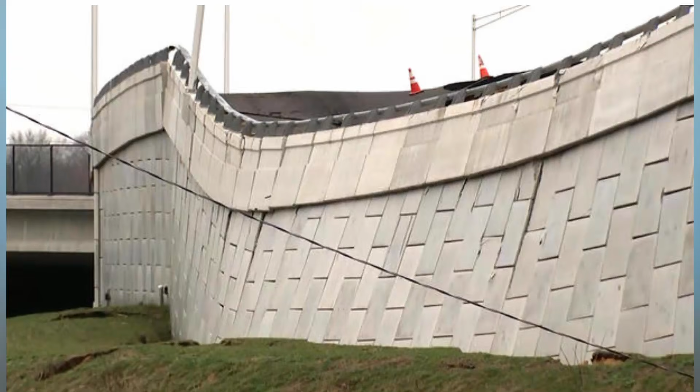So we see a few photos here of the wall failure. This is a mechanically stabilized earth retaining wall. Over a 300-foot section failed overnight on March 25th, 2021.

Now, where things get interesting is there's a local CBS News affiliate in Philadelphia, and this reporter, Brandon Goldner, I think he was relatively new in the TV news business, but he had a natural curiosity about how something like this could have occurred. So on his own time, he did investigative research over a period of 2 years and requested public information, public records about this wall failure, and he just got it. He did a news story about this last week.

As an aside, I really applaud that type of initiative. I think this country needs more people like that in whatever jobs they have. In the last few years, there's a lot of talk about quiet quitting and just doing the bare minimum, which I've never been in favor of in terms of work. If you're a person that shows initiative and has a natural curiosity, you're going to learn a lot of things. Your job's going to be way more interesting, and you're going to bring tremendous value to whoever you're working for. That's going to pay off in the long run. That's my view of things.

Now, this reporter brought in Grady Hillhouse from the Practical Engineering channel to review this information and offer some opinions. The reporter asked Hillhouse why the DOT ignored persistent and obvious warnings from the contractor that this wall was going to fail. I'll just play you what he said here.

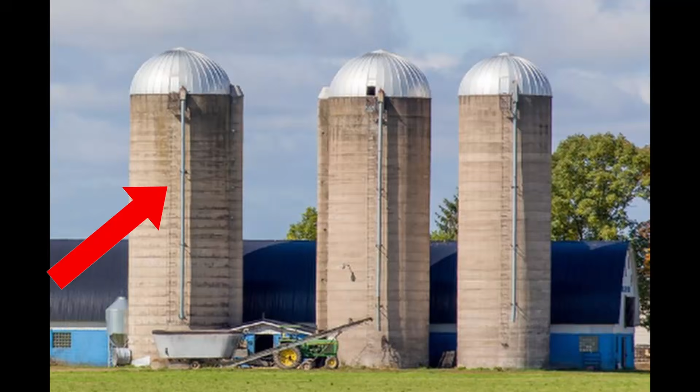You typically have the DOT as one silo. You have the project designer in another silo. Now, sometimes the designer is DOT staff, but more often than not, it's an outside private consultant, which was the case here for the overall design of this retaining wall. And then the final silo is the contractor.

Unfortunately, I've seen this a number of times where the DOTs think they're only doing their job if they pretty much just bust the chops of the contractor from beginning to end throughout a project. They seem to think that the contractor's out to get them at every turn, and the DOT's the keeper of all things quality and proper, and the contractor's just going to try and get away with whatever he can to cut corners and save money. And that's just not been my experience.

Most of my work in the last 25 years on these DOT projects has been done for contractors. I'd say 95% of my business comes from working with contractors. And the contractors I work with are extremely dedicated and want to produce a high quality product. They don't want to have any problems, end up in lawsuits, or get a bad reputation. This work is extremely competitive, so their reputation means a lot. So I don't agree with this adversarial mindset that I see in too many instances on these projects.

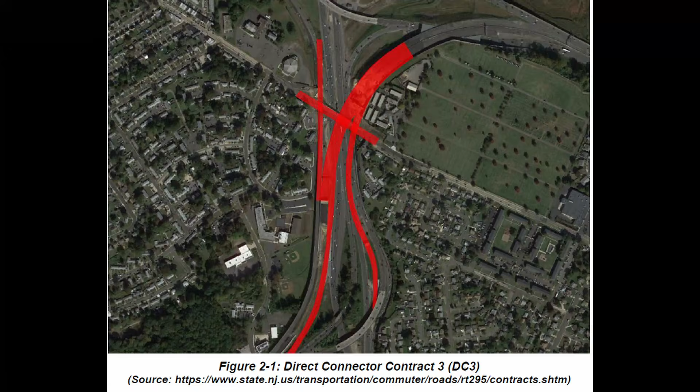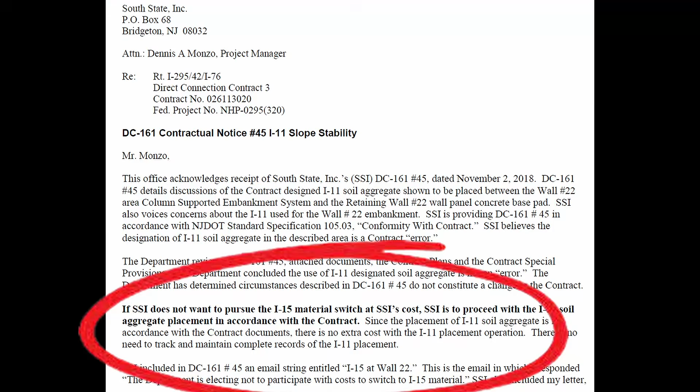As I'll discuss later in this video, the contractor pointed out what could be done to avoid this wall failure. It was going to involve some extra costs, and rightly so, because their designers were going to have to do additional work and produce additional or revised construction documents. It was going to cost $70,000. The DOT came back and said, well, if you want to do that, you can do it on your own expense - we'll approve the material change, but we're not going to pay for any part of it, which was extremely short-sighted. They traded a $70,000 expenditure for a $92 million expenditure before it's all said and done.

I don't know what kind of accountability is going to come out of New Jersey DOT relative to the people involved with this project. I don't know too many people in the private sector who could cost their agency $92 million and a lot of embarrassment and loss of reputation without having some serious repercussions. I have no idea. Seems like accountability is not high on the list these days with government entities.

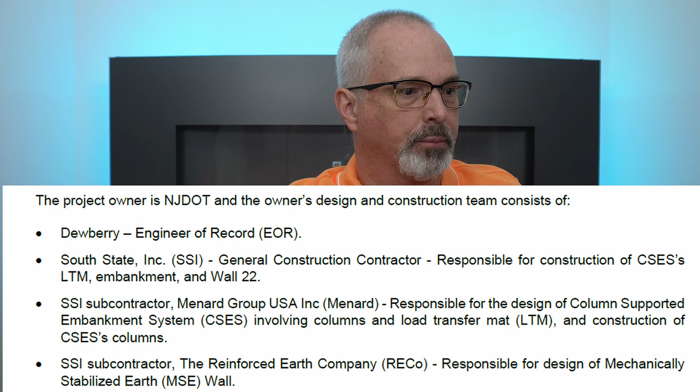Some of the other players: Dewberry, the engineer of record, were responsible for the overall design of this retaining wall. Then you have South State Inc., the general contractor, who gave New Jersey DOT repeated warnings that they were using the wrong material for this retaining wall, and that it should change to a more freely draining material to avoid a future failure of the wall, which ultimately occurred. Then you have Menard Group - they designed the column-supported embankment. And then you have the Reinforced Earth Company, who designed the mechanically stabilized earth wall. So Menard and Reinforced Earth Company were sub-consultants to the prime contractor here, SSI, as I'll refer to them.

And that's typical in retaining wall design. The designer, say for the MSE wall, is only responsible for that discrete portion of the wall. And then somebody else is responsible for what they call global stability, analyzing the thing as a whole. So the Reinforced Earth Company was responsible for designing the MSE wall, Menard was responsible for designing the column-supported embankment system, and Dewberry was responsible for the overall design and making sure it was going to work, including global stability.

Then you have South State, as I mentioned, Menard, and Reinforced Earth. You also had a few other players as a subconsultant to the prime contractor. You had Wang Technology that installed the inclinometers and other instrumentation to monitor the condition of this slope throughout construction. And then you've got New Jersey Department of Transportation Bureau of Materials.

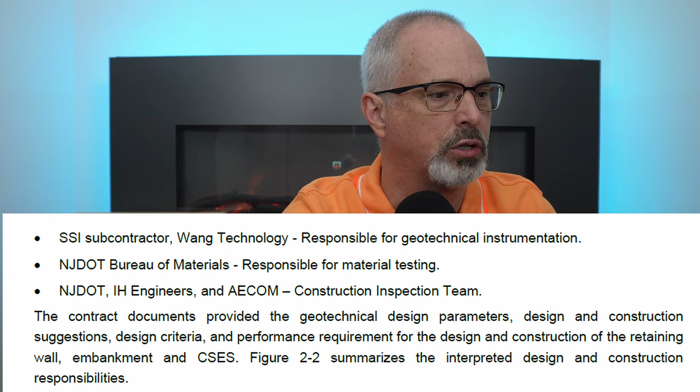They were responsible for material testing, the fills and other materials that were used to construct this retaining wall. And then you have both New Jersey and IH engineers and AECOM responsible for construction observation while this wall was built.

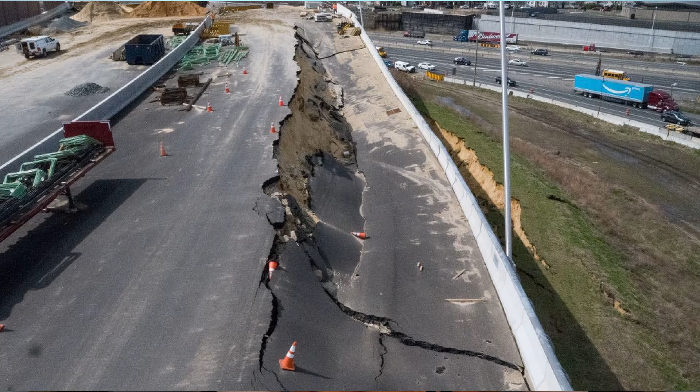Now, as I mentioned, this wall failed exactly in the way that the contractor said it was going to fail, and that was a global stability failure. Anytime you see loss of material at the top of the slope and a scarp forming, which is a vertical or near vertical face, and then a bulge of soil material at the base of the wall, well below the bottom of the wall, that suggests you have a global stability failure.

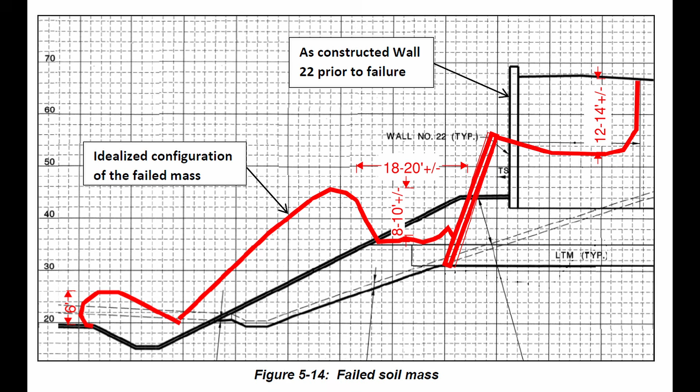It's obvious. Here we see a cross-section of the failure. The red line shows the post-failure configuration of the slope. So you had a loss of material at the top. You had a lot of tilting of the MSE wall face, and then you had a big bulge of material piling up at the base of the slope as it failed.

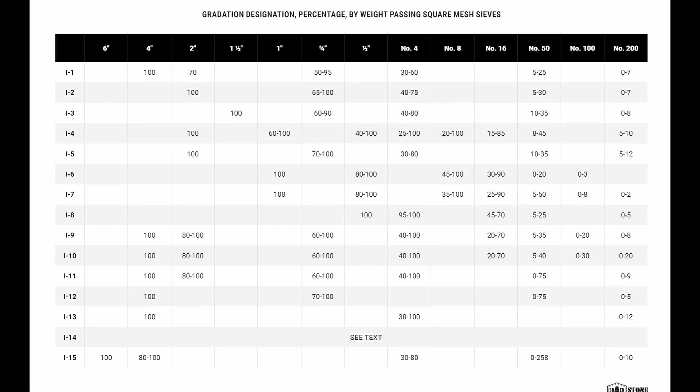Now, as I mentioned, there was correspondence from the contractor, most pointedly and earliest in 2018, saying you're using the wrong material for the backfill. You're using what they call I-11, which is a pretty fine-grained sand that doesn't drain very well, and the contractor thought they should be using I-15 gradation material, a little bit coarser, has better drainage characteristics. So this type of correspondence and notification went on back and forth throughout the duration of the project.

And then on March 24th, 2021, as the wall began to fail, the contractor issued this letter to the DOT, and it summarizes all his prior warnings. I mean, it's an I-told-you-so letter, and it was appropriate for the contractor to send this, in my opinion. It's just ridiculous that these warnings were overlooked and disregarded.

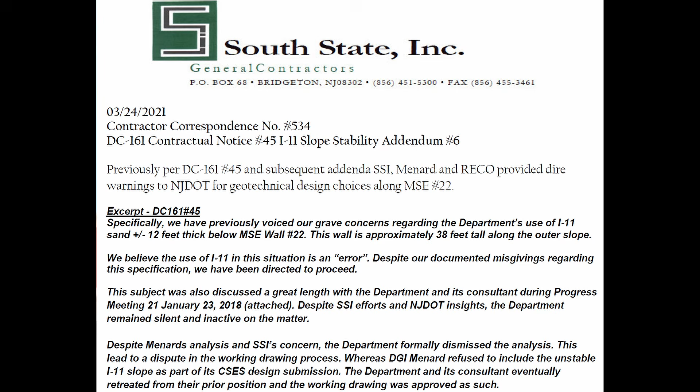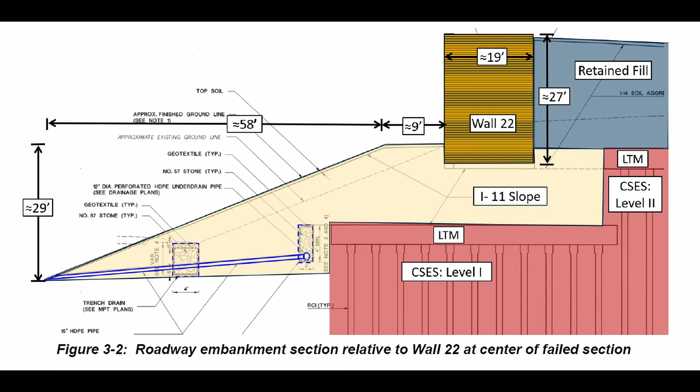So you can see reference here to them mentioning in January of 2018 that this was the wrong backfill material to use, and that their specialty consultant for the column-supported embankment agreed that this was going to be problematic material if it wasn't changed. So again, the yellow is this I-11 backfill. The contractor said that needed to be changed to a coarser gradation that would have better drainage characteristics.

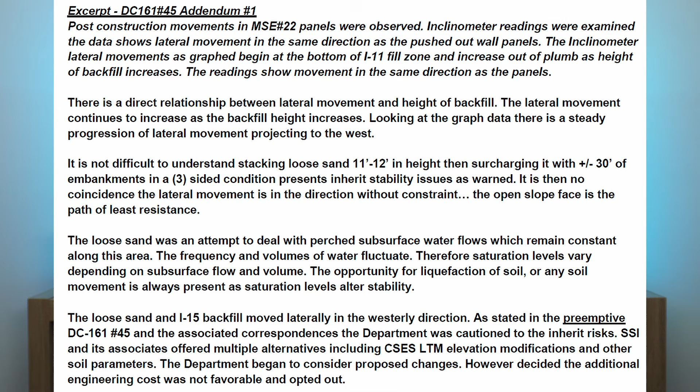Here's some additional details: there were noted instances of wall panel displacement. The inclinometer readings showed movement of the foundation soils, which resulted in tilting of the backfill and the wall elements.

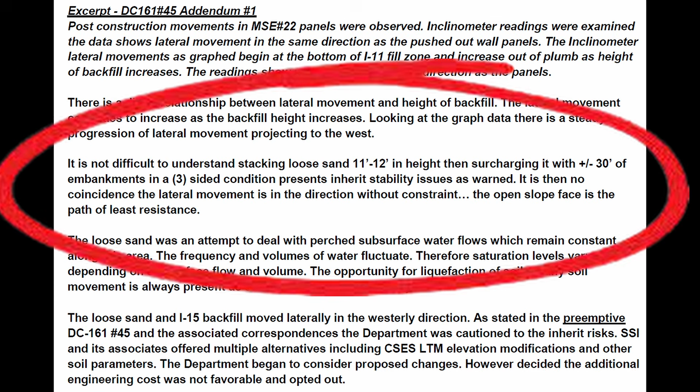You got to appreciate this paragraph. It is not difficult to understand that stacking loose sand 11 to 12 feet in height, then surcharging it with a plus-or-minus 30-foot embankment in a three-sided condition, presents inherent stability issues as warned. It is then no coincidence the lateral movement is in the direction without constraint. The open face is the path of least resistance.

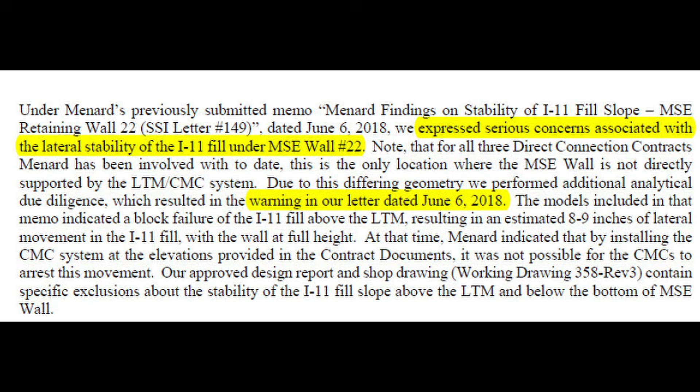And in this March 24th, 2021 letter, which was issued just a few hours before the wall ultimately failed, they point out that Menard expressed serious concerns associated with lateral stability of the I-11 fill under MSE wall number 22. This is the wall that failed. And they said they performed additional analysis that showed this wall was going to fail, unless there was a change in the backfill material.

So this part of the letter references the fact that New Jersey DOT considered that these early signs of wall distress were due solely to the lack of proper placement and compaction methods of the backfill material by the contractor. And what Menard points out is, no, these movements are completely consistent with our analysis in that you're using the wrong backfill material.

Now, as I mentioned, this letter went out from the contractor to New Jersey DOT on March 24th, 2021, less than 12 hours before the wall had a massive or catastrophic failure. Fortunately, no one was injured as a result, but it could have been very different, especially if there had been traffic over the top of it.

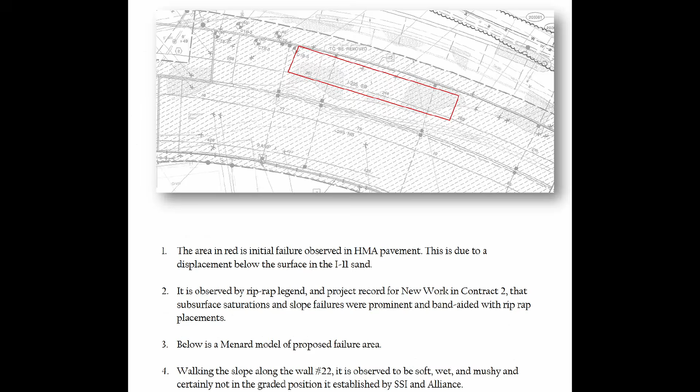So you can see the red highlighted area is the area of tension crack development in the roadway section. This roadway is on top of the MSE wall, and the contractor references the DOT's prior responses, which mention that the department disagrees with the circumstances of the wall panel resetting. It cost the contractor $65,000 to reset these wall panels early in the process of construction.

And the DOT said, that's your problem, we're not paying for it. They also point out that the contractor told them this is the wrong fill material, and again New Jersey DOT said, no, we're fine with it. Our consultant Dewberry reviewed it. We're sticking with that I-11 material.

Now this is a pretty interesting statement, and again I think it's appropriate. It seems to SSI, Menard, and Reinforced Earth Company, the limited liability language provided in New Jersey DOT responses has no effect on the ongoing geotechnical realities. New Jersey DOT now has a significant issue to deal with, in spite of the very detailed record of warnings beginning with this correspondence on November 2nd, 2018.

So in other words, the DOT's designer, Dewberry, was ultimately responsible for this wall. They had the responsibility for checking the global stability. The specialty consultants working for the contractor had a very narrowly limited scope of design responsibility relative to either the MSE wall or the column-supported embankment. So in other words, this is New Jersey's baby all the way, and the contractor warned them repeatedly.

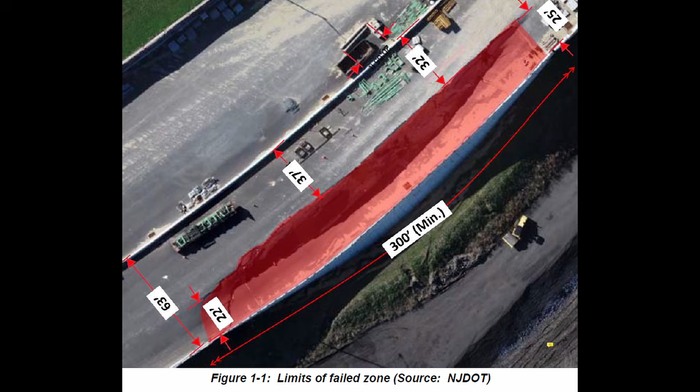Okay, so the wall fails overnight on March 24th, 2021. Here's a view of the wall failure from a photo included in the forensic report done by Hardesty and Hanover. You can see the red highlighted area on the roadway section, above the MSE wall. And then down below you see the green grass-covered slope that's all bulged up, indicative of a failure that goes from the top of the slope down through the foundation soils, pushing material out beyond the original toe of the slope.

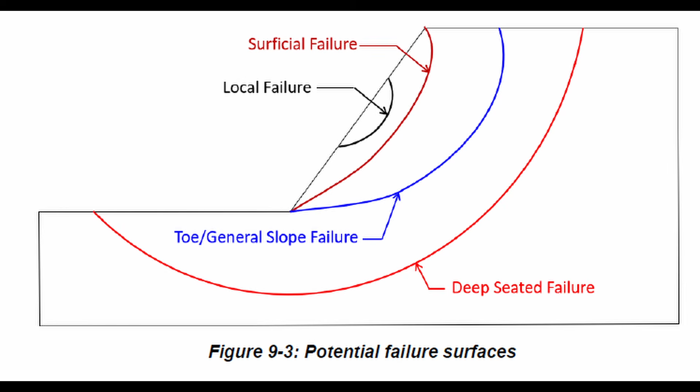So when I talk about global stability analysis, this is what's called a limit equilibrium calculation. You assume a trial shear surface, break it into vertical sections, and assign a soil unit density. With the geometry, you determine the forces pushing the slope downward and the forces resisting that movement, including the available soil shear strength along that potential shear surface.

And the type of failure that occurred here is a deep-seated failure. Whenever you have a deep-seated failure, that means you've got a problem with your foundation soils. In this case, those foundation soils correspond to the I-11 backfill that the contractor said needed to be changed to I-15, so it wouldn't retain as much water, would have greater shear strength available, and provide greater resistance and a higher factor of safety against a potential failure.

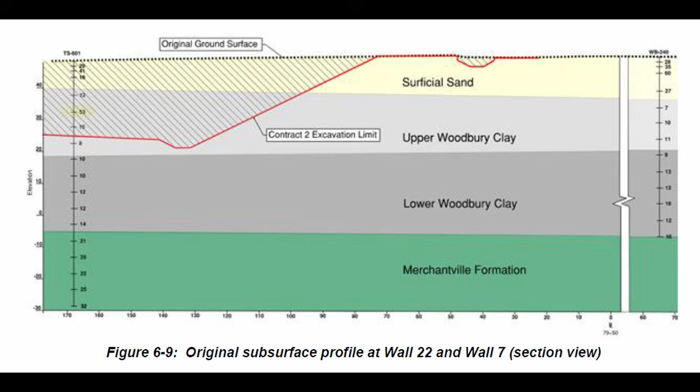So this is what the soil profile looks like. You have a surficial sand, an upper clay, a lower clay. The Merchantville Formation underlying these clay deposits is indicated to consist of hard silt and clay with medium to very dense interbeds of silty sand. So obviously you wouldn't be concerned about a potential shear surface going that deep.

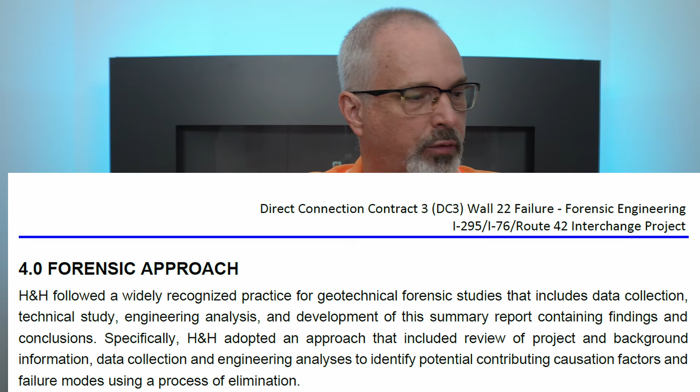H&H followed a widely recognized practice for geotechnical forensic studies that includes data collection, technical study, engineering analysis, and development of this summary report containing findings and conclusions. It goes on to say this was done to identify potential contributing causation factors and failure modes using a process of elimination. Now, I don't disagree that you have to be thorough and open-minded in these types of studies, but given the failure mechanism and the repeated warnings from the contractor and the contractor's specialty engineering consultants that this was going to happen, and it happened exactly how they said it was going to happen, it's pretty obvious.

And I don't see that a full-blown forensic study taking nearly a year after the wall had failed was necessary. I did a search and found that New Jersey DOT spent $283,000 for Hardesty and Hanover to do this forensic analysis. That's a lot of money, especially considering that they weren't going to spend the $70,000 to do this construction right to begin with.

Given how this failure mechanism was pretty obvious and consistent with exactly what the contractor said would happen, I think this study could have been done for about $10,000 and completed within a month. So you have to ask yourself, was New Jersey DOT being super thorough and examining all possibilities? Or is it a matter of them desperately hoping that a forensic investigation would uncover something somewhere that the contractor didn't do right? I think the latter is a possibility, but there's no information in the correspondence confirming this.

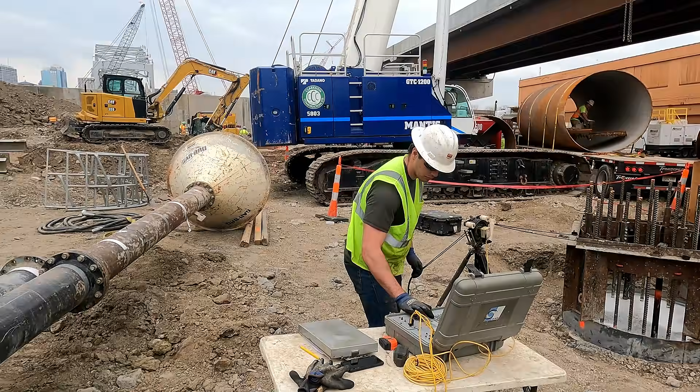So this notion of the DOT spending extra money so they could hang the contractor with extra responsibility or costs, I see in a small version with my testing of drilled shafts for bridges during construction. There are instances where, I'll show you a quick video of what the CSL data collection looks like. We've got probes that go into steel tubes cast inside the reinforced concrete drilled shaft, and we send an ultrasonic signal from one tube to the next, so we're able to identify areas of low density that might be weaker concrete, gravel, or a soil inclusion.

There are times where I identify a very small area that may have questionable quality concrete, and I may even say, yeah, it's small, it's right next to, in this case, tube number 1.

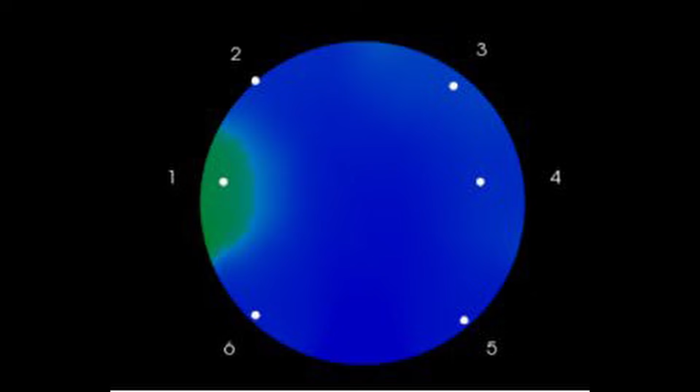If you try to core it, which is a common thing to do for identifying anomalies found through cross-hole sonic logging testing, you perform a full-length core to get to that zone of interest, usually at the bottom of the shaft. And I'll say in my report that it's probably not worth coring — I don't think you'll be able to hit it.

And I see in several instances where they'll do the core anyway, they don't hit anything, and then they'll do a second core, presumably hoping to intersect an area of poor quality concrete, because if it's good concrete in all the cores, the DOT has to pay for the coring. But if any poor quality concrete is confirmed through a core, the contractor has to pay for all the coring costs. So it seems in some cases extra holes are drilled in the hopes that the contractor has to pick up the tab for all of that investigation.

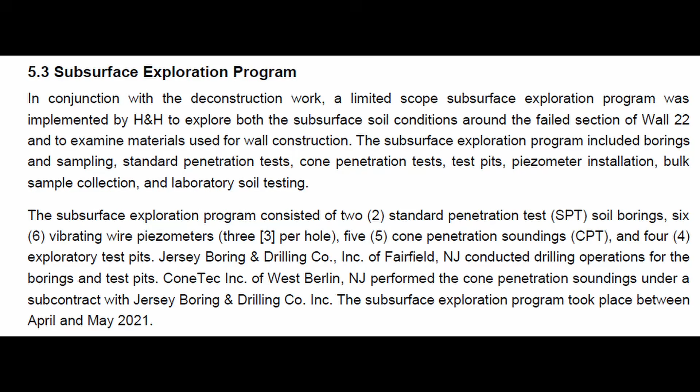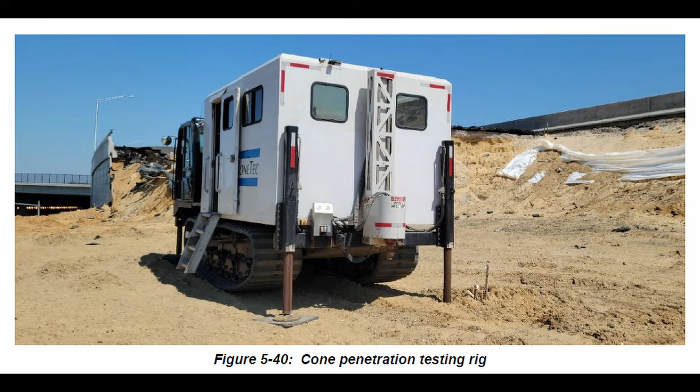So I'm going to go through what H&H, Hardesty and Hanover, did for their forensic investigation. They did soil borings, cone penetrometer testing — that's the cone rig there, where you push a cone with electronic instrumentation and get characteristics of the side resistance and tip resistance, allowing you to classify the soils. You can also do pore pressure dissipation tests, stopping at a given interval to measure the time it takes for excess pore water pressures, developed by pushing the cone into the ground, to dissipate, giving you a good idea of the drainage characteristics of the material.

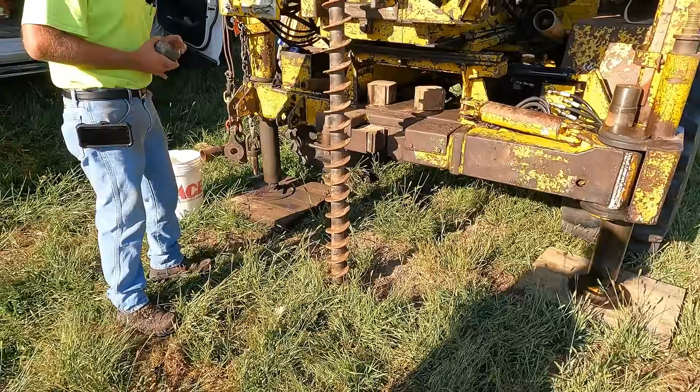Here's a short video of just standard drilling and sampling.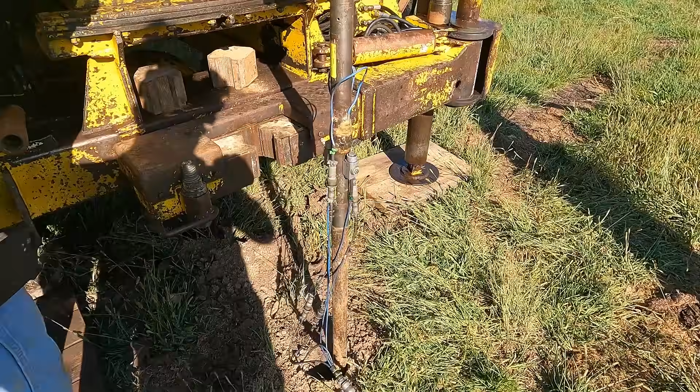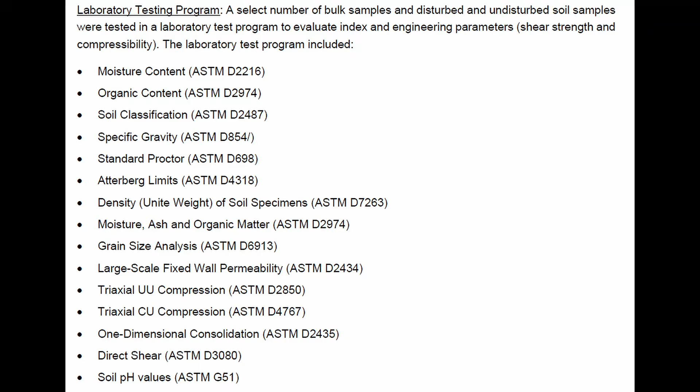Another type of soil sampling is with a steel tube, thin wall tube that's pushed hydraulically into the ground, and that's used to obtain high quality samples to perform very expensive testing, whether it's strength testing or consolidation testing, to determine the load settlement characteristics of that material. Then there's a bunch of laboratory testing that they did, index testing, strength testing, so on.

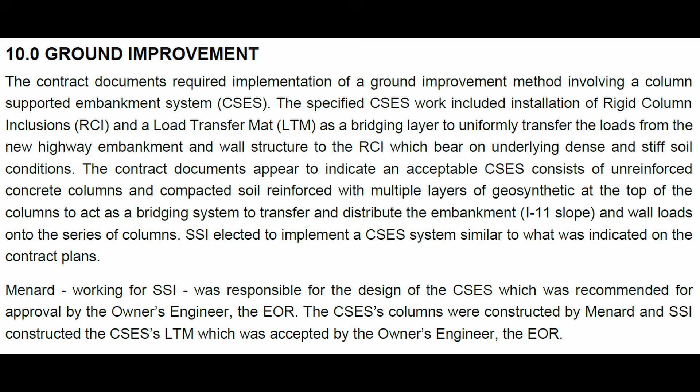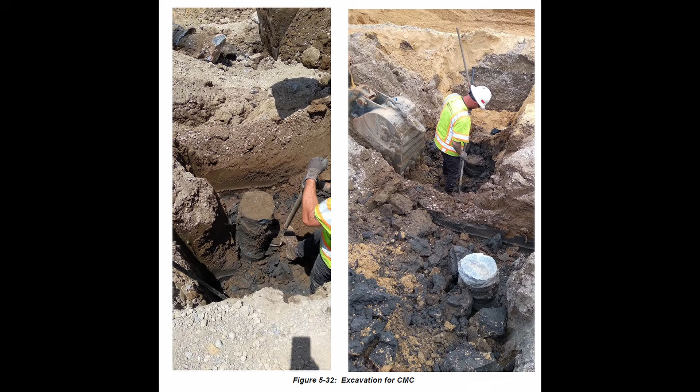So this part of the summary of the forensic investigation report indicates that Menard designed and built the column-supported embankment as they should have, consistent with the project requirements, and it was signed off by New Jersey DOT and their designer of record, which was Dewberry. Here's some photos from the forensic report showing exposure of these column-supported elements, these rigid inclusions.

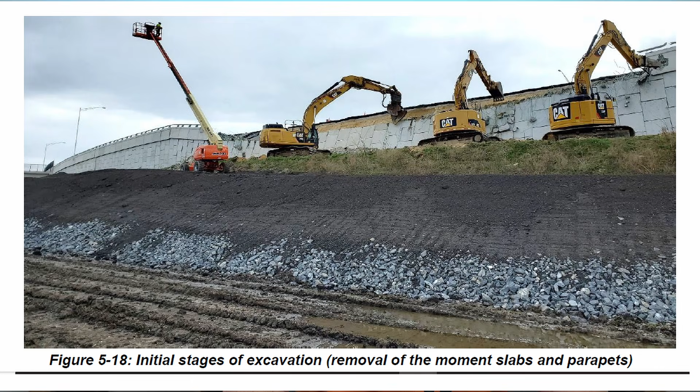This photo shows a line of backhoes that were involved with removing the failed portion of the wall, and the forensic engineer for their report had people out there making a lot of observations about the in-place material for the wall and just how it was constructed.

And they say, based on our review of the construction records, the construction practices followed New Jersey DOT standard specification requirements for the MSE wall construction, that is, moisture content and density control practices, met the requirement of maintaining a minimum density of 90% of the maximum density. So in other words, they placed the material as they should have, they being the contractor.

In a similar fashion, they found that the MSE wall was designed properly by the Reinforced Earth Company. It says, lastly, the design document concludes that Wall 22 design would function satisfactorily if built on stable ground. The design document assumes that others would be responsible for the design of the foundation soil's adequacy to support the wall without failure or excessive deformation. Others here refers to Dewberry, the engineer of record.

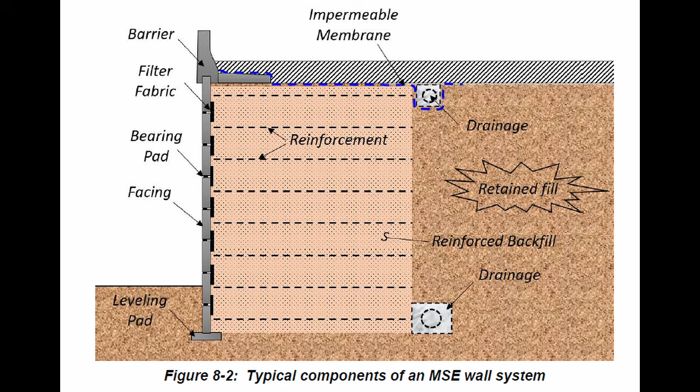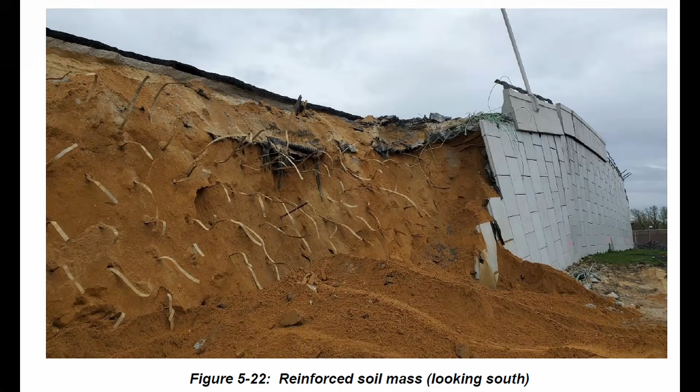Based on our assessment of background information and the site and subsurface conditions, it is H&H's opinion that Wall 22's failure mode is complex and involves both vertical and lateral displacement of the I-11 material and a deep-seated bearing capacity / global stability failure. It is H&H's opinion that the following are the significant contributing factors that led to the failure. Let me just interject here. I don't think it's particularly complex. It failed exactly how the contractor said it would fail.

The I-11 material used for the embankment and slope was not an appropriate material specification to support Wall 22 because of its poor engineering properties at high moisture content. The part that they leave out is that the contractor told them repeatedly that you shouldn't be using I-11 material. And New Jersey DOT and their designer of record didn't heed the warnings.

And because that fill zone wasn't strong enough to distribute the loading properly to the column-supported embankment system, it indicates that as constructed, those elements should have been reinforced. But again, that's essentially, if you're going to use crummy material, you needed a beefier column-supported embankment system.

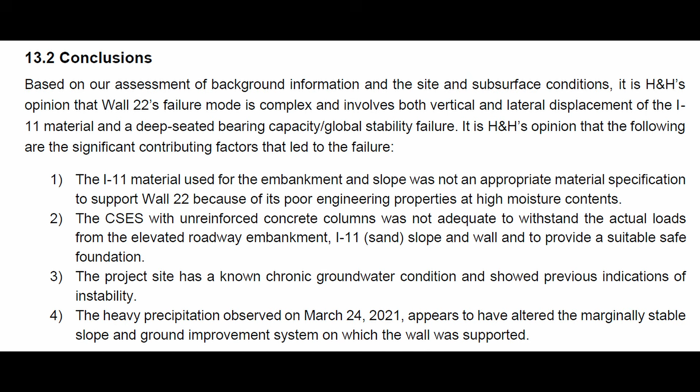They also mentioned the project site has a known chronic groundwater condition and showed previous indications of instability. Yes, throughout construction. And again, the DOT tried to insinuate that it was the contractor's fault for improper fill placement and other construction methods. The heavy precipitation observed on March 24, 2021 appears to have altered the marginally stable slope and ground improvement system on which the wall was supported.

But again, there were instances of heavy rainfall in early phases of the construction of this retaining wall, and the contractor said, see, this is what I'm telling you, there's going to be a problem. And again, New Jersey DOT and their designer of record didn't act on those warnings.

Now, in the information dump that came from CBS News that was released by New Jersey DOT, there's a response from Dewberry to these prior warnings from the contractor that this wasn't the right fill material and that there were going to be problems with the wall over the long term. So you can see this letter from Dewberry on October 11th, 2019. And essentially it says what they're doing is they're reviewing these contractor notices that there's going to be a problem if you persist in trying to use this I-11 sand backfill material.

And what's interesting is the entire body of this response letter has been redacted. And you have to ask yourself, this is a technical matter. Either the designer agrees with the contractor's warnings or they don't. So the fact that this is redacted after the fact just leads to speculation as to what was in there. And I have no idea.

But if I were to speculate, I would say that whatever was in there isn't favorable to Dewberry or to New Jersey DOT. You know, were they trying to dismiss this contractor by suggesting that they had bad motives, or that there was not a problem, but they are acting out of other concerns? Who knows? But I think it's really unfortunate that they saw fit to redact this information.

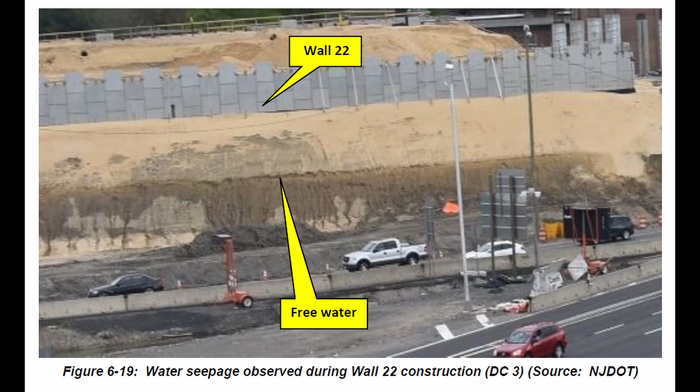And as a geotechnical engineer, I can tell you, if you design a slope and as part of your design assumptions you've got a freely draining embankment, and you think there's going to be seepage, or you notice seepage later on, that should be a showstopper that, hey, this isn't how I designed it. Because if you have seepage exiting the slope of a fill slope that you designed based on essentially dry conditions, the presence of seepage can cut your factor of safety in half.

And a lot of times these embankment fill sections are designed to have just the bare minimum factor of safety of 1.5. So any seepage on a slope designed for a 1.5 factor of safety is going to reduce the factor of safety below adequate levels, and in many cases reduce it to a value below unity. In other words, there will be a failure at some point. So that warning was ignored by New Jersey DOT and their designer of record, Dewberry, apparently.

So one thing I want to relate to here is, you know, how could the DOT ignore this stuff repeatedly? And I see this in my own practice. I test bridge foundations during construction. Half my work is for driven piling. The other half is for drilled shaft foundations. And I've had numerous instances where my scope is just to merely perform the testing of the pile. I'm not responsible for what the design capacity should be, what the lengths should be, and so on.

And there have been many instances where I've pointed out, hey, I've reviewed your plans because I'm getting ready to go test these driven pile foundations, and you've got a problem here. I gave a warning to a DOT about some large diameter closed-ended piling, and that size piling with a closed-end configuration had never been used in that state before. And the soil profile was a saturated, medium dense sand. And I also pointed out that you should consider looking at a smaller pile section, but with more piles so that you don't have this problem with installation.